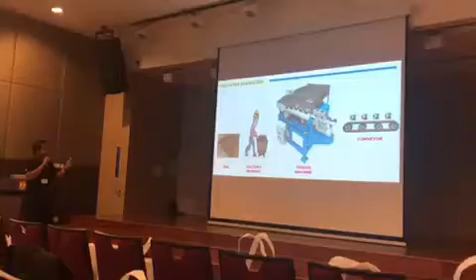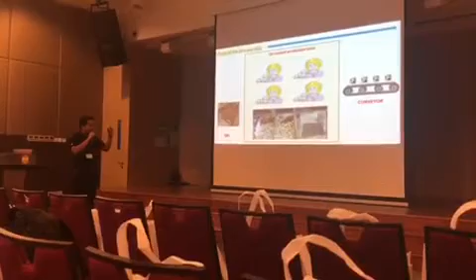His automatic line - not all of his lines are actually automatic. He had some manual production lines, wherein operators or factory workers were manually picking a lot of items from a bin and putting them on a conveyor.

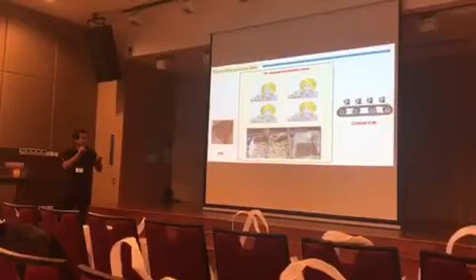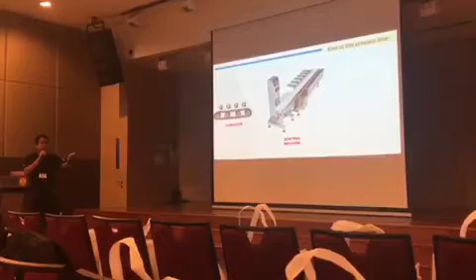He saw that, worked further down the line, and ended up at the end process where he saw his conveyor again, with products now being sorted out by a sorting machine, sorted into different bins - different products of different sizes and shapes go respectively to different bins.

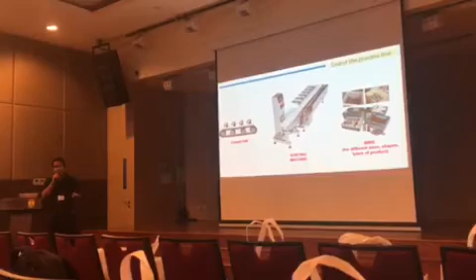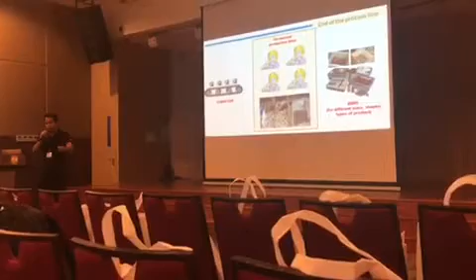He saw this, and again, not all his lines were automatic. Some were manual. Operators were manually sorting product A to this bin, product B to this bin, product C to this bin.

And then he went back to his office and thought. This was his thought process: we have a high mix, low volume of products. What does this mean? This means he has a variety of products, and sometimes he produces them in small amounts.

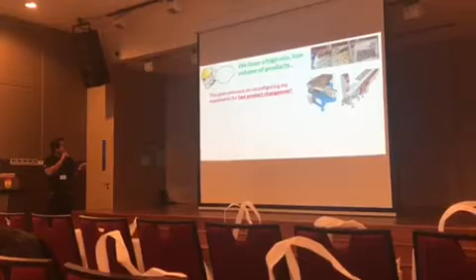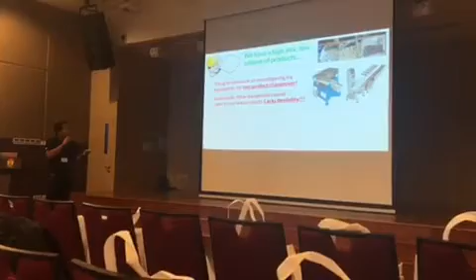So with this, he said it gives pressure on him reconfiguring his equipment for fast product changeover, because he needs to keep doing mechanical adjustment every time there's a product change.

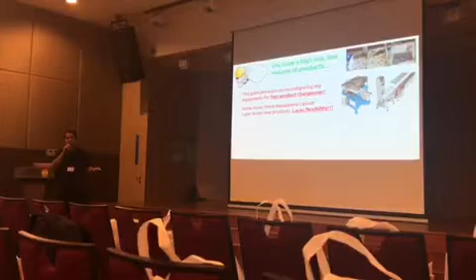He felt that some equipment cannot cater to new products. He has new products, but there's a maximum width for his machine. He'd need to buy a new machine or modify it. So actually, the machine was lacking flexibility. This is what he felt.

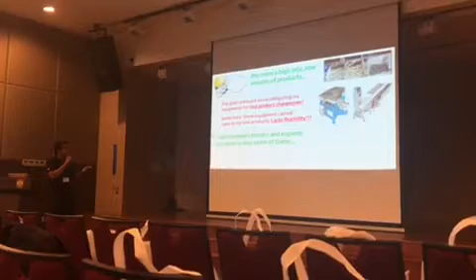And then he thought also, if I get investors' money and expand, I may have to buy more of this, or maybe hire more of them.

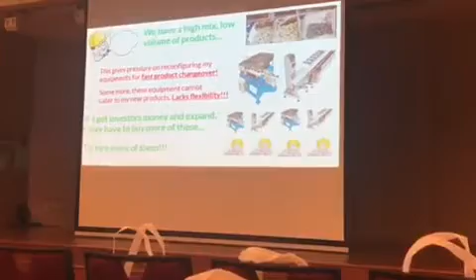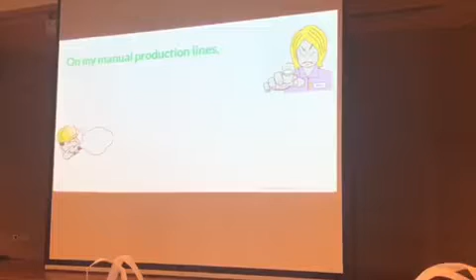He also realized that on his manual production lines, his operators were exposed to labor-intensive tasks. Sometimes they had to pick heavy, rusty, sharp, or even hazardous items.

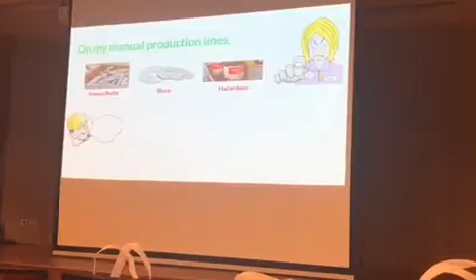So luckily, he attended this. So you're all very lucky. Okay? Luckily, you're here.

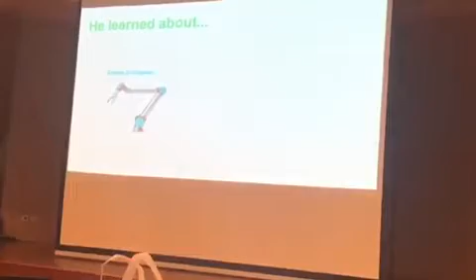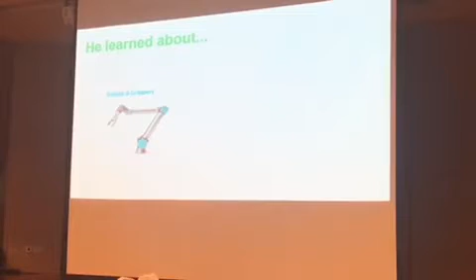Because of this seminar, he learned about robots and grippers. Later on, we have Universal Robots to talk about more of this, and Nachi as well. Grippers too, because without the right gripper, you may see the object but cannot pick it - just imagine a person with an eye but no hand. Later, we have OnRobot and Zimmer to talk more about the grippers.

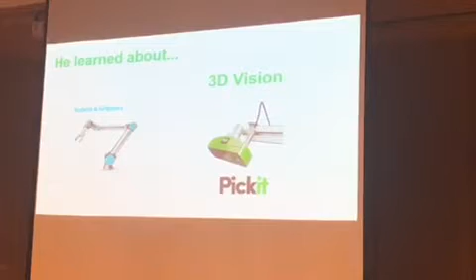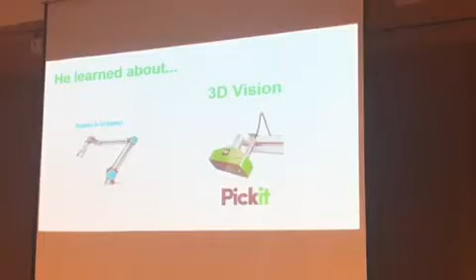But most especially, he learned about 3D vision with Pick-it. Just like what Max said, it's not 2D, it's 3D. He can see the depth of the item and pick it, see the product at an angle and pick it. So he was convinced.

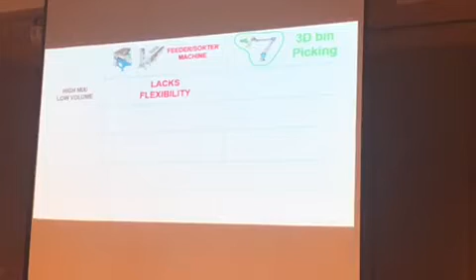So what he did was compare the feeder sorter machine versus 3D bin picking, in terms of several parameters. First, high mix, low volume - which we've already realized. It lacked flexibility, but the bin picker was highly flexible because the robot was programmable and the vision could be taught a lot of products.

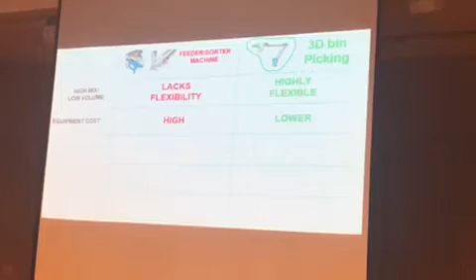Equipment costs - the bin picker was lower. Maintenance task costs - of course the machines were high. You had a lot of electrical parts, so you need electricians, and a lot of mechanical parts, so you need a lot of technicians to maintain them.

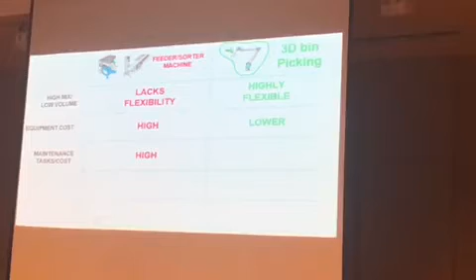Well, this one was minimal. Actually, nowadays, even an operator can do some programming of the robot - you just need to give them some proper training.

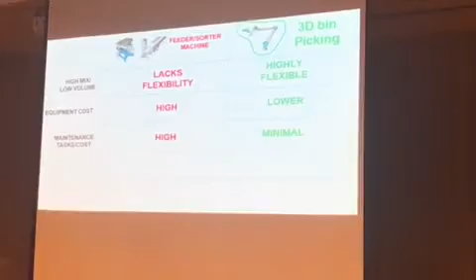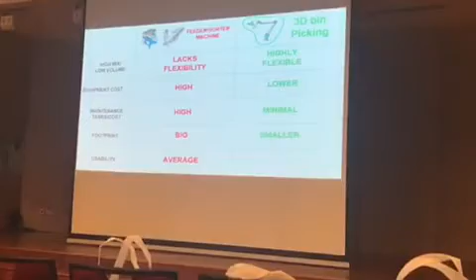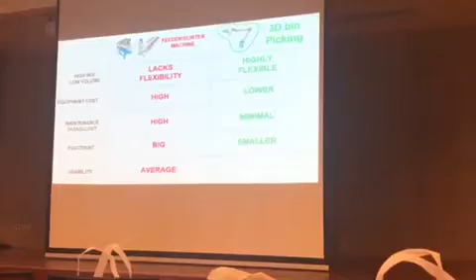In terms of footprint, the bin picker was smaller, relatively. And in terms of usability, this one was average - it depends on how skillful the HMI programmer is with touchscreen programming. If you have time, you make it nice; if no time, just put a button to start - okay, ready.

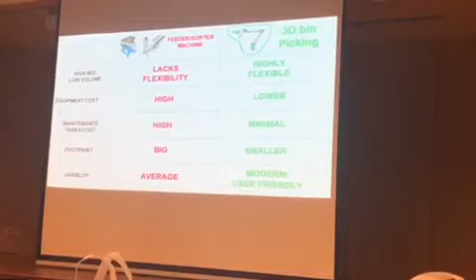But for the 3D bin picker, it is modern. It is user-friendly, web-based. Everything is web-based - you don't even have to install the software anymore.

So obviously, for this, the 3D bin picking was a wise choice. So he went back to the start of the process line and deployed this - before he had this, now he had this.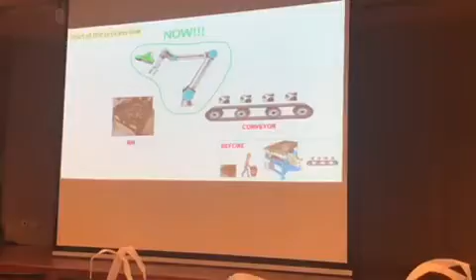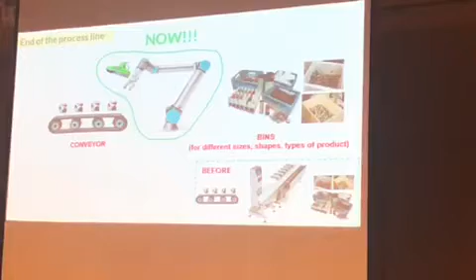You can see the footprint change - he got rid of this. And at the end of the process line, he had this before, now he had this to sort.

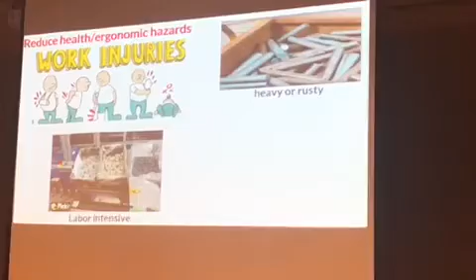Furthermore, he was able to reduce the ergonomic hazards because the operator, now replaced by the bin picker, was doing the labor-intensive, heavy, rusty, sharp, and hazardous bin picking.

So, congratulations - Mr. Ilong Ma saved a lot of money for the company. He did the expansion and got a fast payback on the investment. He eliminated the use of feeders and sorters which lacked flexibility.

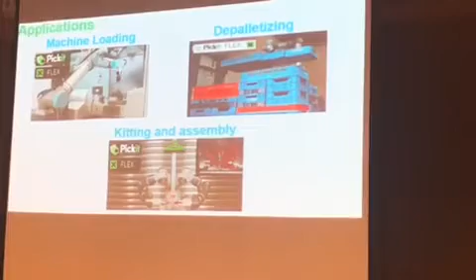He was so happy that even for machine loading - CNC machine loading parts - he put a robot and a vision system there too, 3D picking. For depalletizing, kitting, and assembly, wherein you connect or combine assembled parts, he also implemented this.

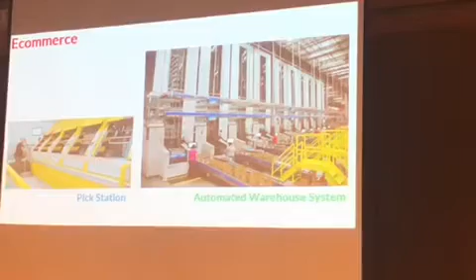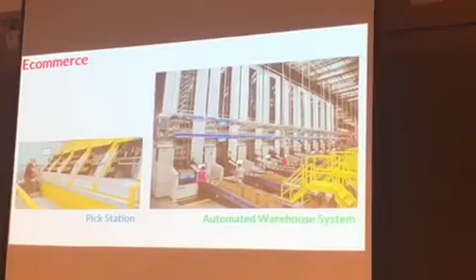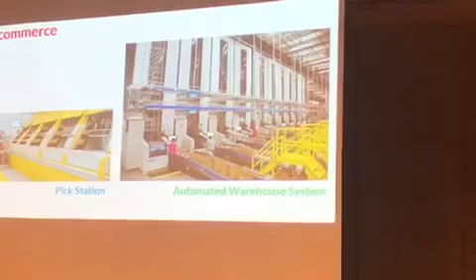And nowadays in e-commerce, the automated warehouse system has made it so sci-fi that you just choose a product and some robot or AGV will go fetch it. But you can still see the people there who are still manually doing the picking - we call it the pick station. This also is an opportunity to do 3D bin picking.

Also, he thought of this: an automated storage and retrieval system - put the vision system on an AGV, and then just tell the AGV to replenish the inventory. So the AGV goes around and tries to put items on those that are low on stock.

Also, you can give it a grocery list - okay, I want 3 items of milk, 3 items of chocolates, go fetch it for me. So he also applied it to this.

And he was successful - Ilong Ma was a success. Do you get the joke? Do you know Elon Musk? Everybody knows him, right? Actually, he was Singaporean - he started here. But don't tell anyone, okay? This is just a secret inside this room.

So he actually founded SpaceX, Tesla, Solar City, right? He is so disruptive now in the industry. So he was a success. After - oh, don't, that's why this information shouldn't leak out, okay?

So then we asked, what happened to the operator? Did he lose his job? Is it?

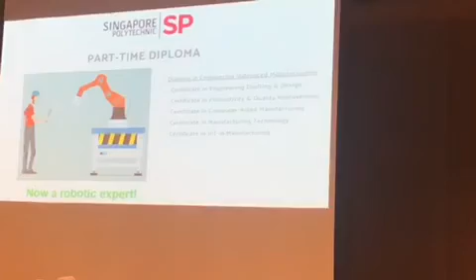That guy became this - he now became a robotic expert. Imagine, from being a bin picker, picking 1,000 items, now he became a robotic expert. And they all lived happily ever after.